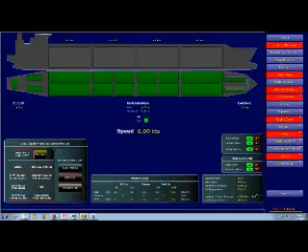Now we are going to present you the session. This is the first time you are looking at this ship. Again, like the other ships, I must give you the familiarization of this particular vessel, the gas carrier.

So far, we have worked on the Type B and Type C tanks, which can sustain certain pressures. This is the membrane tank, which has got a complete secondary barrier, and the tanks from inside are very thin, but the good thing is that they are prismatic tanks. You can see inside the tank, I've created this exercise so you can see it has got 5.2 kPa

pressure inside the tank. What we have done so far with this one is that we have gone through the drying process of the tank. So currently you are looking at the status page where we have got the electrical emergency shutdown condition, optical, pneumatic. You may notice that we have managed from the engine room to cancel all the alarms, so we are fairly active

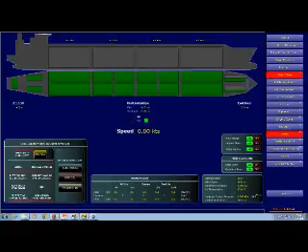Ship whistle is on, general alarm, water curtain is on, because of course we are standing by on the shore, so we always keep the water running. Ventilation room motor is switched on, machinery room motor is switched on. This is what I have done during the creation of this exercise. The other environment is that wind speed is about 18 knots, 180 degree direction, 23 degree air temperature, and the hydraulic system is working, so there is no alarm on hydraulic.

So on our next page, where you will be able to see my cursor, there is a fixed gas detection alarm. So let's go and see what that alarm is for. And it is fairly obvious that there is a low flow alarm in the gas analyzer. That means the gas analyzer motor has tripped and no gas analyzing is happening. So all these gas detection points are not really in operation. So what we will have to do is put it on.

First, of course, we will acknowledge the alarm, and as soon as we acknowledge this alarm, we should have this thing stabilized. Then we'll put it on manually, and we should switch on the pumps. And did you notice the moment I switched on one pump, the low flow alarm has gone and my gas detection alarm has now cancelled. Fixed gas detection is now in operation manually.

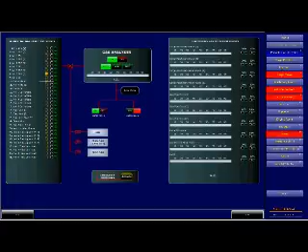Now you will see a different characteristic here. We have got interbarrier spaces and insulation spaces, IBS and IS, here. The rest is almost the same. So at the moment we are sniffing here, and we are detecting. What we have done with this tank is that we were removing the moisture from the tanks in the past exercise, and we have managed to remove the oxygen, and we have managed to bring the dew point temperature to minus 26.8, which is fairly good.

So at the moment I am analyzing manually the top of number 4 tank. Let's go and see the middle condition of number 2 tank. So I will switch on this thing, and of course in between any analysis, what we do is we purge it with air. So we have now purged it with air.

It is showing 20. Once we have purged it with air, as soon as the air is off, we are going to start our analysis of this tank, and let's see what the result will be. Yes, the environment here is also minus 26. Here it is minus 37.8, which is ideal. Well, let's see what the bottom status is.

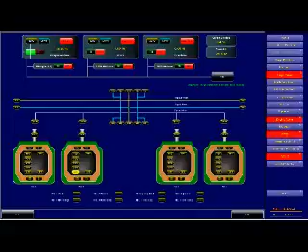Let's see on the bottom part of number 2 tank or number 3 tank, and let's do the analysis of dew point. You see here the bottom dew point is 26.0. So folks, you have now noticed that at different places we have got different levels of dew point. And of course, our job is to keep purging, to keep removing the moisture till the time we have the dry air.

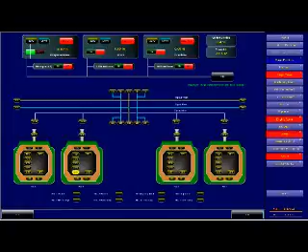So that was our portable gas detection system. Cargo pipelines, yes, rather than our spherical tank, we have got this type of arrangement here. Because we are taking the air from it and drying it, we have dried it. So we have built a little pressure in the tank because we were blowing dry air into the tank.

Okay, and of course this is our pressure, 5.2, and the temperature in the lines of the vapor is about 20.1, 20.3, etc. So you can see that there are no alarms here. Everything is in order on the cargo pipeline system. Let's go to the manifold area. Manifold area, everything is in order. All blanks are in place.

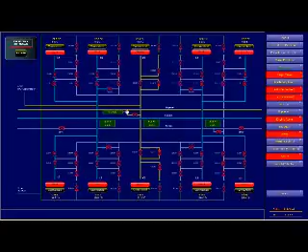The outside temperature is about 22.8 degrees. Here we have slightly negative pressure. Maybe it is because of shrinkage or cooling or something. Then the rest are all 0 kilopascal pressure. All valves are closed. So we are happy about it. Now let's go to the cargo tanks.

In the cargo tanks, you may notice that this is red. It is not flickering where my cursor is. It is not really flickering, but it is steady red. And why is it? Because when we switched off the pump last time after pumping it out, the low amperage alarm came and that is still standing by. Now this is the temperature reading in our tank.

In the trunk of this tank, especially in the custody transfer system, we have multiple level thermometers, and those thermometers will give us the temperature at different levels. So 21.2. Can we load the cargo in here? Not at all, because there is oxygen in the tank, and the temperature is not on a cryogenic level at the moment, so we'll give a thermal shock to the tank if we start loading the cargo. And of course, we never want this situation.

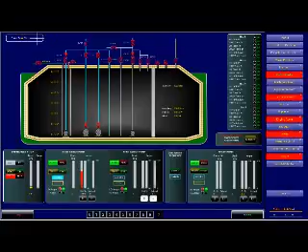So our tanks are technically dry, but we have got the air pressure of 5.2 kilopascal, and all our pumps are technically stopped. So those were our cargo tanks. We were at the moment looking at number 1 cargo tank. We can go to number 2 cargo tank, and more or less the same situation is there in all the cargo tanks. Okay, let's move on to the machinery space.

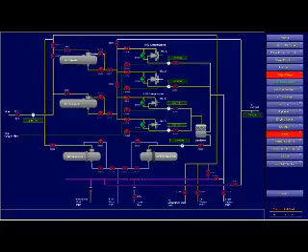What is happening there? The discharge side valves of the HD compressors are open, clear, so that there will be no pressurization. If there is anything evaporating in there, it will not be pressurized only in this area, it will be just going out everywhere. Then there is not a significant alarm here on this particular unit. Then of course our HD compressors, this is the magnified situation.

It has got a couple of alarms where we have got a low lube oil pressure alarm, which of course will be there because we haven't started the pump, but when we start this thing we will talk about it later. So we have got a nitrogen seal alarm, which we will acknowledge, and of course we will send the nitrogen to it when it will be required. Okay, but of course you will have to run.

So did you notice the moment I started the nitrogen supply to the compressors, that alarm has gone. Only the low lube oil pressure alarm is coming, which we need to see. And now you can see the nitrogen is supplied to the compressor with about 789.8 kilopascals. All right. So this lube oil pump will sort it out when we start the compressors.

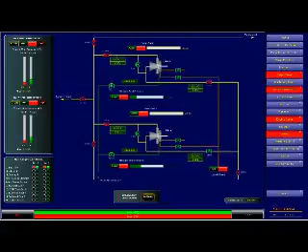So control air pressure for these compressors is about 800 kPa, which is good enough. But the pressure in the lube oil is low. So let's move on now. We can see the HD compressor has got a steady light on it, not flickering like the LD compressor. So we'll go to the LD compressor.

Again, more or less the same situation here, where we need to give a supply of coolant and this thing here, and of course we will have to give a nitrogen supply. Can you see it was on 0 and now suddenly it is rising. The moment it rises, the nitrogen alarm or the low pressure alarm will go.

Happy folks? Now again there is a low lube oil alarm, so why not start a lube oil pump. So my last alarm will go off. So let's acknowledge the alarm. And now you can see the light has become steady.

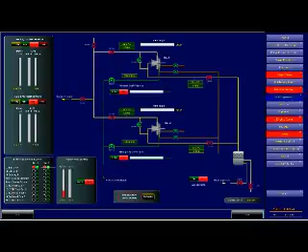Let's see the heaters. The heating system, of course, at the moment is totally closed. There are no alarms and it is fairly okay. The vaporizer, again, we are not vaporizing anything. So there are no alarms here and everything is secured. Now let's go to the engine room where there may be some problem.

We have got our nitrogen generator running, creating nitrogen, filling the buffer tank. The buffer tank is feeding our systems of different compressors, etc. So this is the compressor line which was going there, and of course to the other pressurization headers on the deck. So technically our buffer tank has got 794 kilopascals pressure, and O2 content is 2.05 in it, and dew point is -61, which is better than ideal. So our nitrogen we have got so far is a very good quality nitrogen produced by our own nitrogen generator.

If we were ever short supply of nitrogen, or when we need more nitrogen, we can comfortably put another pump on a standby nitrogen generator and switch on as required. At the moment I do not require another one because I've got sufficient pressure here. So we will continue with this, and folks, take a break.

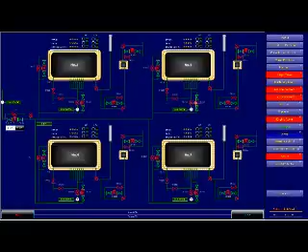Glycol system is used in the cargo system, for glycol has a quality that it will not freeze under sub-zero conditions. So this is the whole unit or supply system. So at the moment there were few alarms because it is not operational, so we'll not go in detail at this moment.

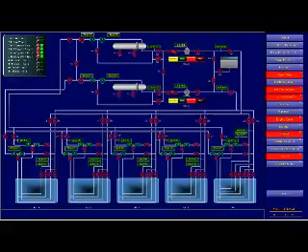In here, this is our lube oil system, which you remember was showing a kind of failure where there was not enough supply going on. So we will start the lube oil circulation pump, and the lube oil will automatically build the pressure. You can see the alarm is there, and you switch on the cooler and let the supply of it begin.

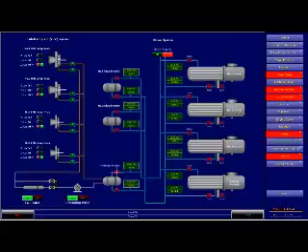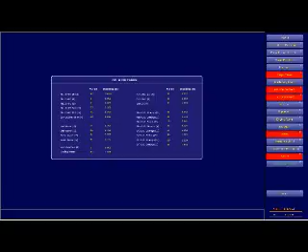This is again our ancillary tanks information, what we have got in which condition. So now let's go to the engine room, because this is the only thing which is flickering at the moment. So we are going to start our pump, and we need to give IG to the tank. So what we need to do is, first we will have to see the IG lines, the purple lines.

So let's go to the cargo pipelines. This purple line is coming from there and going in the tank. What we have got? Air in the tank. What we need to take out? Air. What we are replacing it with? Inert gas. Where we are going to put the inert gas? Top or bottom? Tell me. Yeah, bottom, of course, where you are introducing the gas, heavier gas, inert gas from the bottom, and air will

automatically go up. So first thing, we will prepare for the air to go out. We can easily throw the air from the mast riser. So we have got the common mast risers, or we have got the individual PV valve. So let's open the mast riser valve, but from here, let's open this valve.

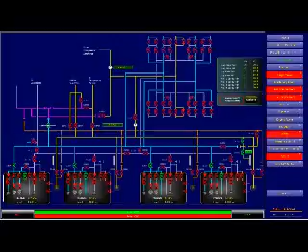So now the second task is to start the inert gas plant itself. So we can see there is low seawater flow now. Yes, it needs a water flow in it. So we will have to start the water flow. From where does this water flow come? From the saltwater ballast line. So let's go to the ballast system and give the water to the inert gas generator.

Put the line here, spool piece here, open the valve, open the sea suction. So the water is coming from the sea chest, going in this direction. So now this is connected to the inert gas generator. The lines are here. The liquid is filled here. Can you see? Because of the liquid level water coming here, there was a very slight discharge pressure.

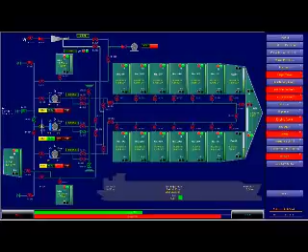We can comfortably open it fully. Now, because the pump is not hunting, the amperes are stabilized. Now this water should be going to the inert gas plant. Let's see. The water has come here. Now the low seawater flow alarm has gone. Magic. Now the only alarm left is the O2 content.

Yes, O2 content is high at the moment because it is filled with air. So we'll just acknowledge them. And of course, when the inert gas starts passing from here, then it will be stabilized. Now you will see at the moment we do not have any alarm in the engine room. It is steady. Now, once we have started the flow of liquid, now you can check the line, and I'll take the control on the panel.